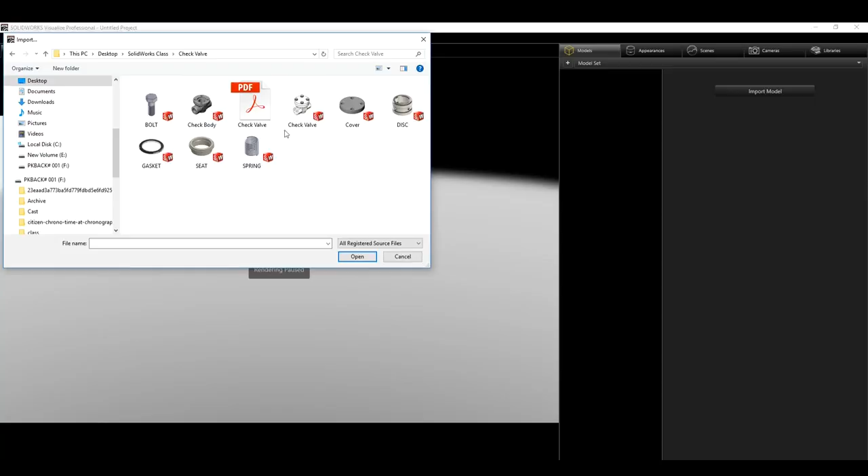So now to start, I'm in SolidWorks Visualize. What I'm going to do is browse to my file location, click import parts and model, and browse to the file location where I have my check valve. This is my check valve. I'll select it and click open.

This dialog, import settings, comes on, and we want to make sure geometry, appearance, monitor file, and automatic are selected. Those are the settings I use, and I'll click OK. Now our check valve has imported.

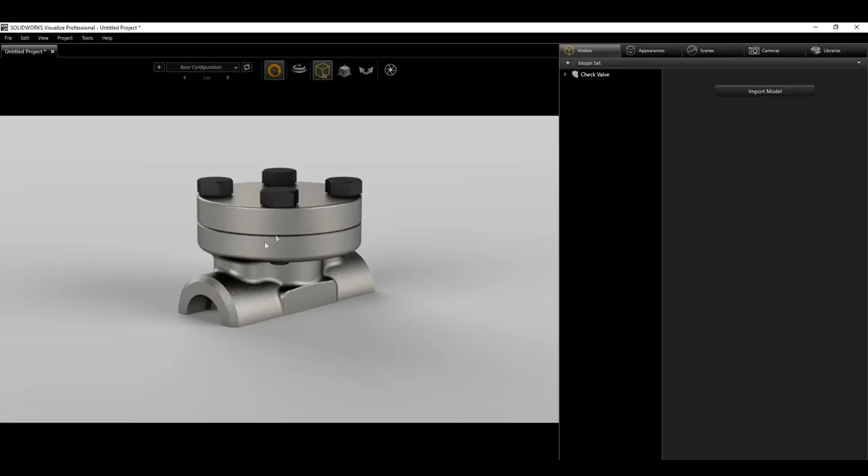Just to preview what these items are: the first one gives you different views to show the preview on the viewport. If I click on the first one it just shows the preview without details, making it easier to work faster in the viewport. The next one shows a bit more detail into the material, and the last one shows even much better detail. So normally, to start when you are working with stuff, you would want to work in the preview mode so everything is faster.

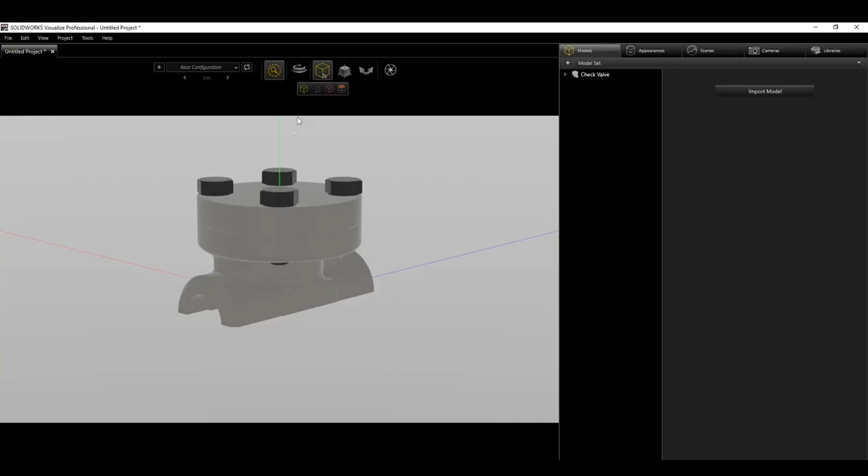This next one is just a selection tool. The first one selects the entire model, the second selects just the part, and the third selects the group. If you click on it, it selects the group, so if you have any group, it will select the group. The last one is the appearance. Normally, I always work mostly on the model and sometimes maybe on the part.

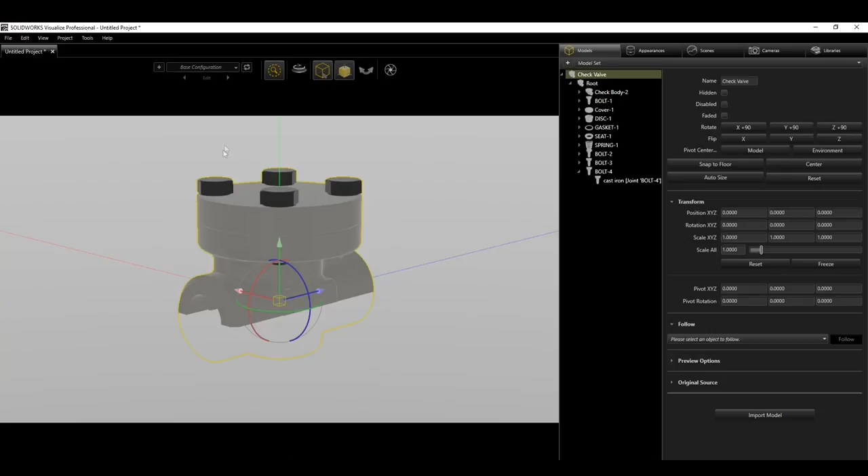The next one is just the object manipulation tool. When you have that open, you can move this around to where you want it. You can move the individual pieces around as well. So that's what that does.

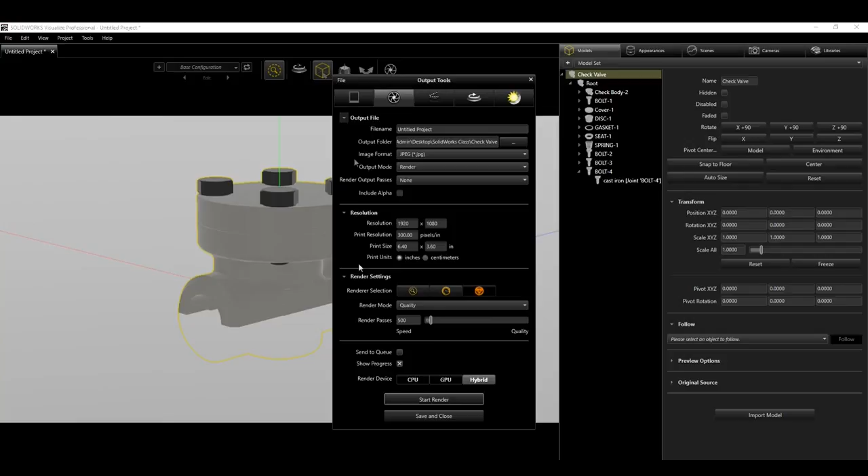The last one is where we are going to render our file out. If I select this render tool, I can render my final output file out to wherever I want to render it. This is the last step we are going to be doing in this lesson, so I'll just close it for now.

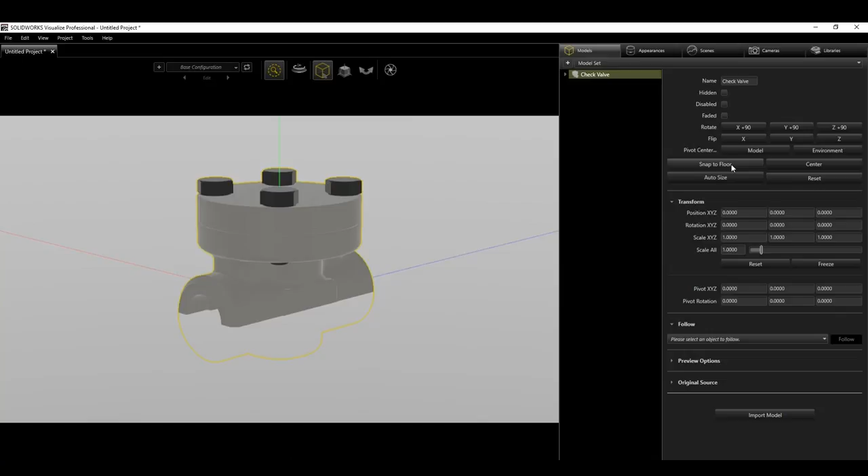Now that we've covered that, let's go into the model tab, and under the model tab we'll have our check valve selected. The first thing we want to do is snap that valve to floor, so we'll snap it to floor.

The next thing we want to do is come down to the preview. We want to enable floor shadow, reflect in other model, and reflect other model. So we have that, and as you can see, the detail is coming in even much better.

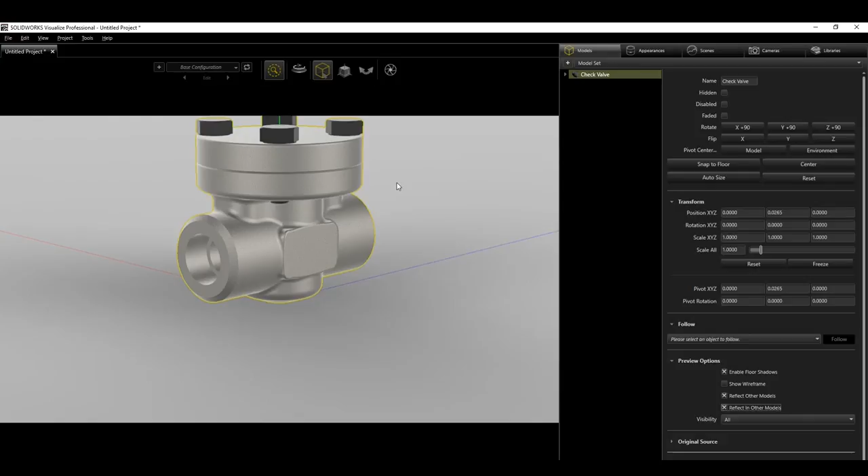Now to move and rotate your valve around on this viewport, all you need to do is hold down the Alt key and the left mouse click, and you can rotate it. What you're actually doing is rotating the camera. You aren't actually moving the valve itself, you are moving the camera. Holding the Alt key and left mouse click moves the camera, just the way I'm rotating it now.

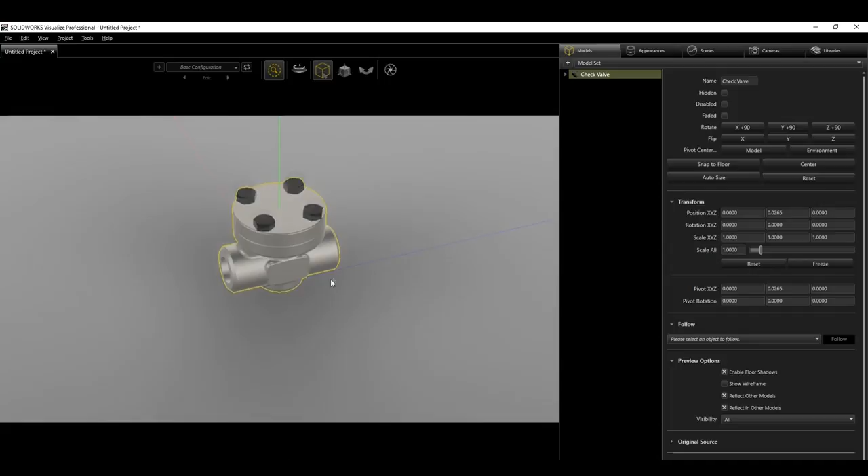If you right click, it zooms in and out. Right click and holding down the Alt key zooms in and out. And if you hold down the scroll wheel, you can move the camera around, like pan it around. So that is how you rotate your view in the viewport to get the camera you want.

So let's say I rotate it and I want something like this. The next thing we want to do now is go into the fast mode so we can see everything much better. Once we're pretty much done with this tab, then we're going to go to the next tab. All these other options are just ways to rotate this view. Mostly I use the Alt key and the left mouse key to rotate my part, and I don't mess with this too much, but there are additional options you have to manipulate your object if you need to.

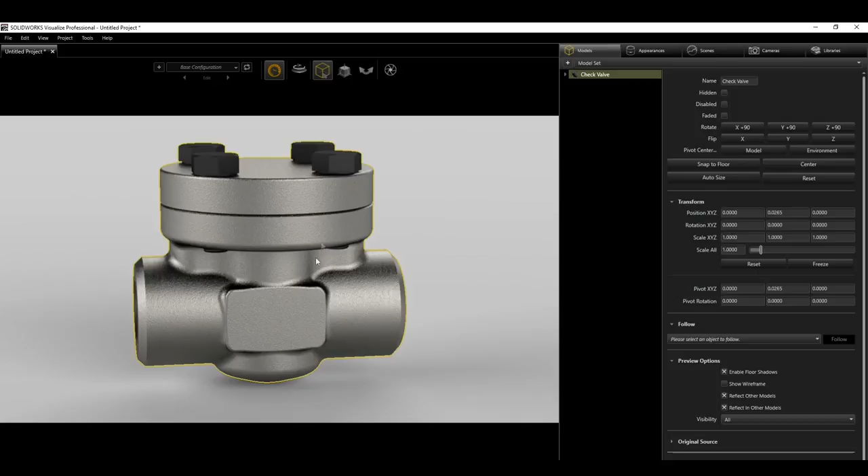Then the next tab we're going to go into is our appearance. The beauty about this is our appearance is actually imported the same exact way we left it from SolidWorks, because we added our appearance in SolidWorks. Now our appearance is actually in our SolidWorks Visualize file, so we really don't have to mess around with this too much.

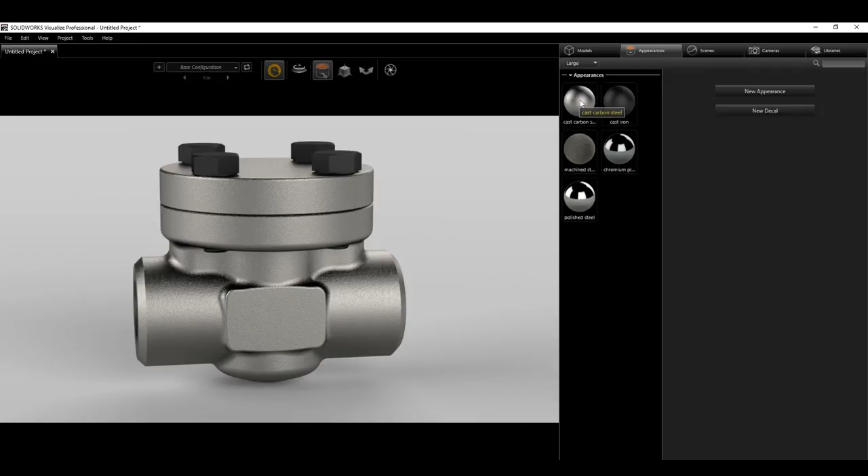So if I select the carbon steel, it tells you what appearance, what part of that valve that is added to. And to make your own appearance, all you need to do is right click or create new appearance over here, select new, then select the type of appearance you want. You can do paint, and click down and select the color you want, and based on the type of appearance you selected, the options will be available for that appearance.

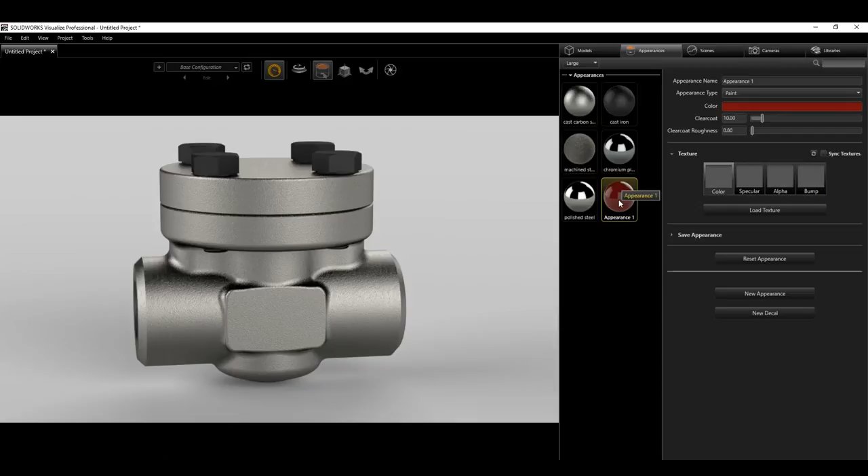So in this case, since we selected paint, the clear coat option is available for the paint. We can change our values for clear coat, and this area of the texture is where we can add a bump map. To add your appearance to your part, you simply drag it to the part, and it's that simple.

And that's how you add an appearance to a part. But for this one, we are just going to stick with our material that we currently have.

Remember when I said the bump map, you load your texture map into this area. For example, our check valve has a bump map, and it allows us to see the grainy, rough surface on our valve. It gives it more detail, because if I take out that bump map and hide it, you can see that detail is gone, and if I enable it, you can see those details again.

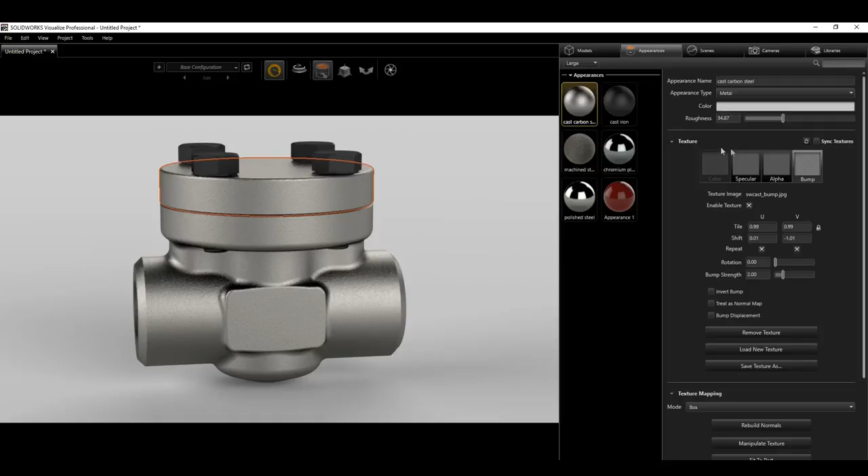So that's how the bump map works, and you pretty much have all these options to mess with. In the scene is where we change the environment.

To change the environment, we simply go into our library. The first library is the environment installed on our computer, and the second one, the globe, is the cloud environment installed on the cloud for SolidWorks Visualize.

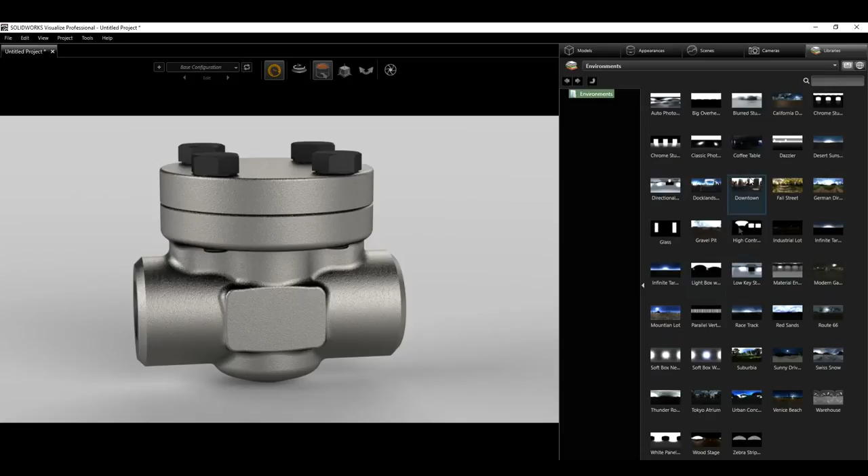I always start with my own environment, and you have a drop down here with camera, environment, image, and other options based on what category you want. For this, we want the environment, so we click on that, and I'm simply going to find an environment that I like, that works better for my project.

This environment we have now works pretty good too, but let's try this white panel. As you can see, this white panel even adds more detail to it, in my opinion. So feel free to mess around with the environment to find whichever one you like best. For me, I'll work with this white panel.

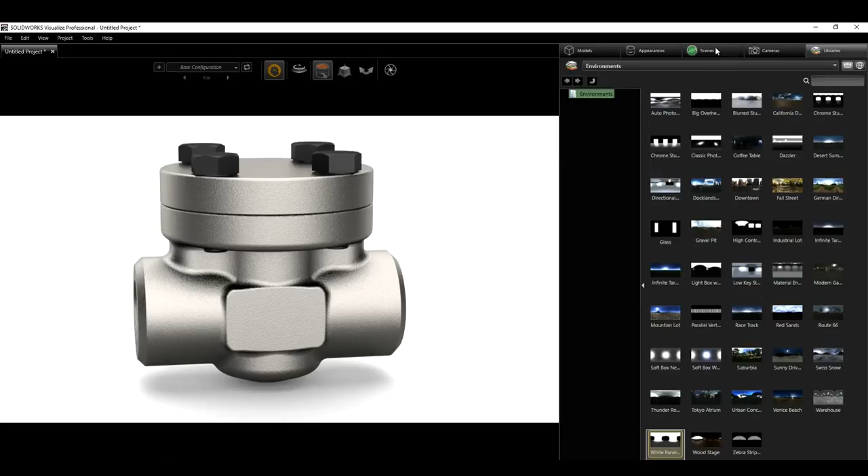When I click on the scene, the white panel environment has been loaded into my scene. So what I can do is adjust the different options for that scene here to get the look, the output I'm looking for.

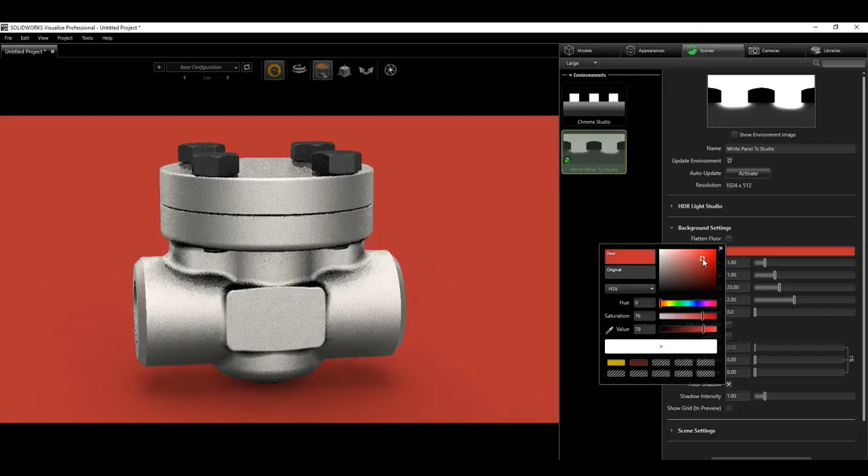But for now, another thing I can do is hide the environment. I always hide the environment, and once you hide it, you can change the background color to whatever you want.

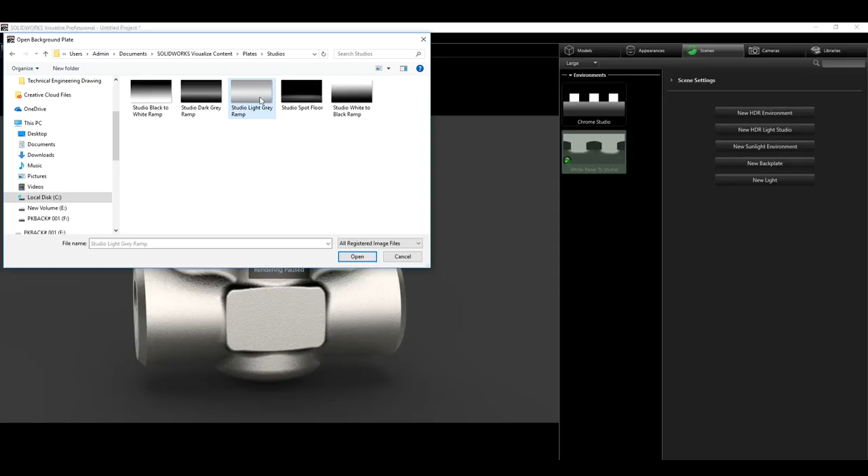Another thing we can do is right click and select new backplate. SolidWorks also comes with some backplates we can use, and if you have any pictures too, you can use them as a backplate. For example, we can select this studio light gray backplate, and as you can see, it's been loaded into our scene.

On our scene, another thing we can check is the floor reflection. We can add something like 0.1, and you'll see now there's more definition on the floor that the valve is reflecting on. Then we just have all these options here we can adjust to get the look we're going for.

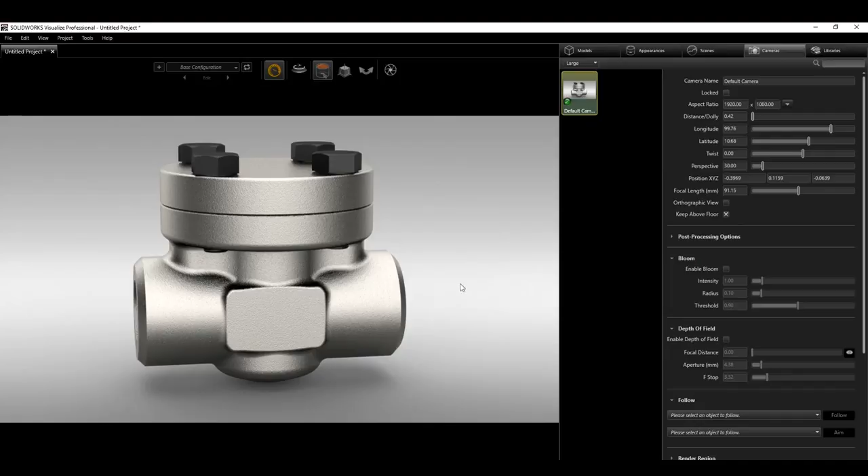Next we're going to go into the camera, and the camera view works the same way. If I hold my Alt key down and left click and rotate, notice as I'm rotating, my values are changing in the right hand box. So that's how to change your camera.

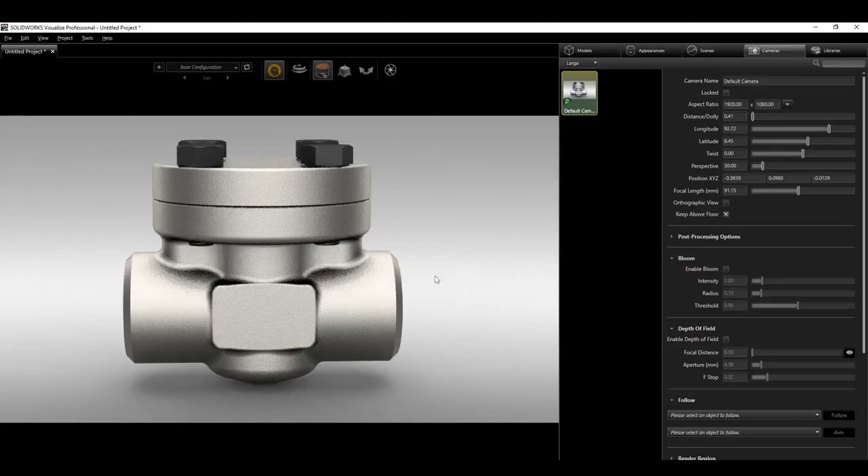Pretty much you can change it manually by typing the values in this box, or you can just use your left mouse click and Alt key to rotate to get the type of view you want. I usually use the left mouse click to rotate and get the type of view I want. So let's say this is the view I want.

Another thing you can do is right click, Control C to copy your camera, or right click on it, copy, and come to the next tab, right click, paste. Now we can add another camera, and when I click on that camera I can add another view, something like that, and I can move it to the center.

So that is pretty much how you work with the camera, and you have all the different settings just to mess around with to get the looks you're going for. And that is pretty much how the workflow in SolidWorks Visualize works.

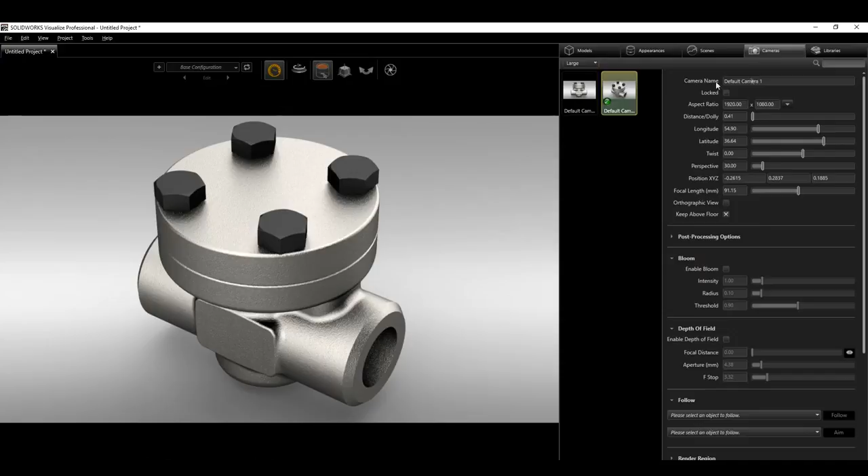When you are done, you simply come here, and I'll go back to my first camera. Simply come here, and we are going to select this, and the file name we can name it check valve.

Then the output folder, we're going to browse to the file location we want to save it, in our project folder. Select that folder. We want to render it, and for resolution, you can pick the resolution you want.

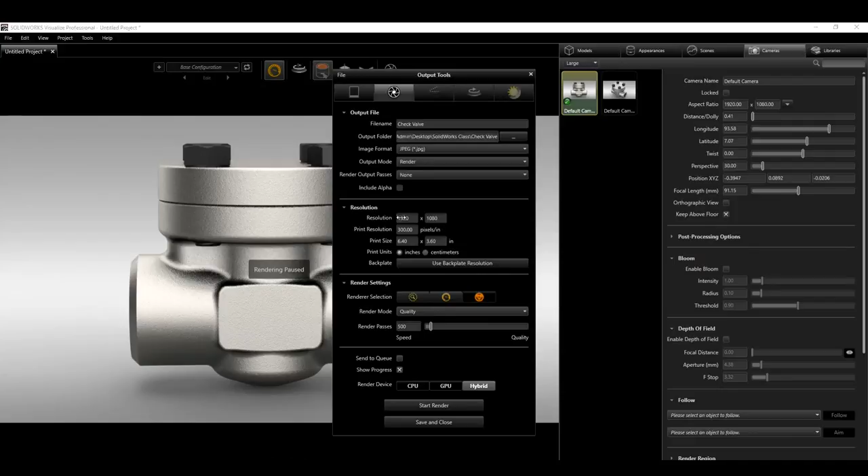For passes, I always do like 1500 passes, and that's pretty much all the settings. Once we're done, we're just going to click start render, and our final image is going to render out.